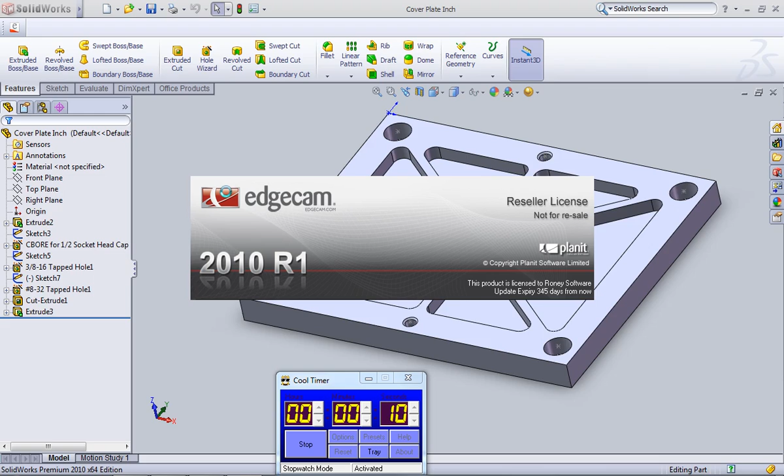Once inside of Edgecam, we're going to launch our Rapid Setup module. We're going to make a few quick choices. We're working with a solid. It's a 2D part. We want one of them, and we want the 0 to be in the center. We're going to be working with mild steel, so that'll set the feeds and speeds correctly for us.

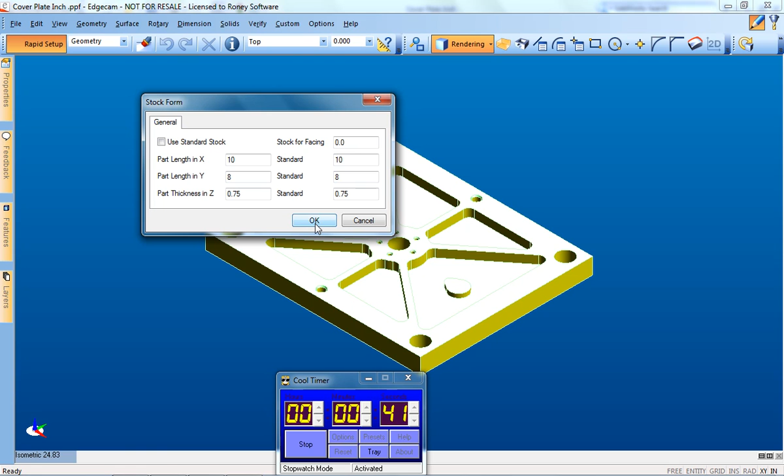Next, we make sure that it's oriented correctly for manufacturing, and we're going to put it on an automatic vise. Take a check of the stock size. We'll choose the extents in this case. And we go out and automatically place this part inside the vise for manufacturing.

Next, we take a look at the part and we can see that we have holes, pockets, and bosses, so we want to nest the pockets and find holes and 2D pockets with Edgecam's feature finder, which will utilize the features from SOLIDWORKS for manufacturing purposes.

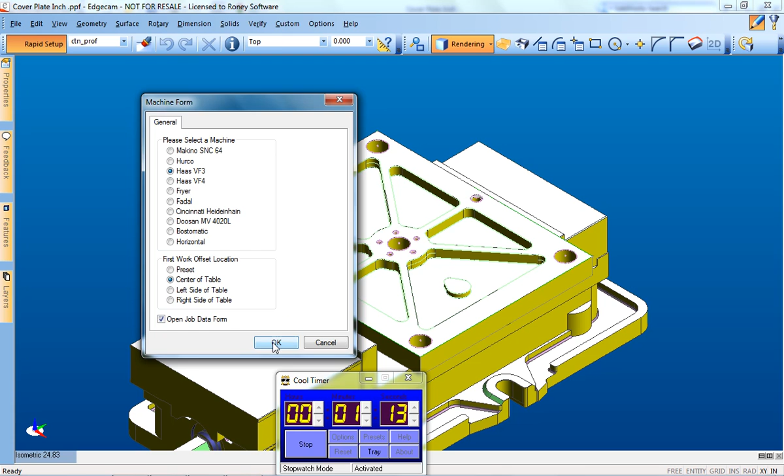And the last choice is simply what machine do we want to put it on. We'll put it on a Haas VF3 and we'll give it a program number.

And in about a minute and a half, as you can see here, we've gone from a SOLIDWORKS file into Edgecam and completely set up this part ready for manufacturing.

So let's do that. Let's go to Rapid Programming, 2D part, and we're just going to accept the defaults here. And as you can see, we are starting to produce the operations to manufacture this part.

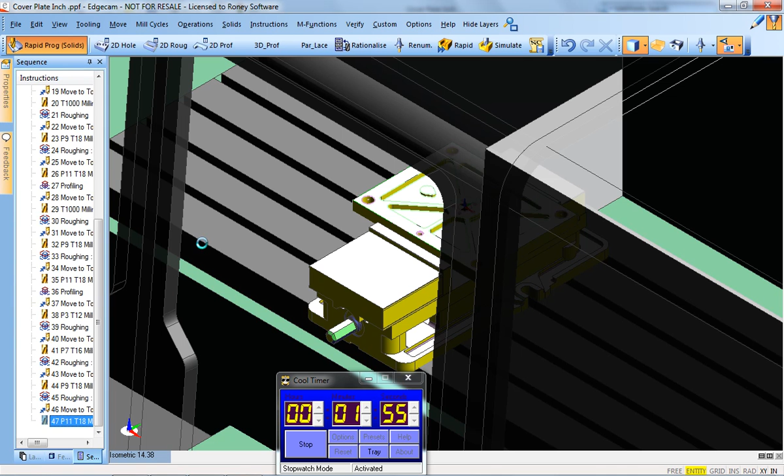It's going to rough it, rest rough it, pick out the corners, finish it in just a matter of minutes.

And in some cases we have options, like that one was if we wanted to ream the hole or just drill it. It was simply yes or no, and Edgecam continues on programming the part.

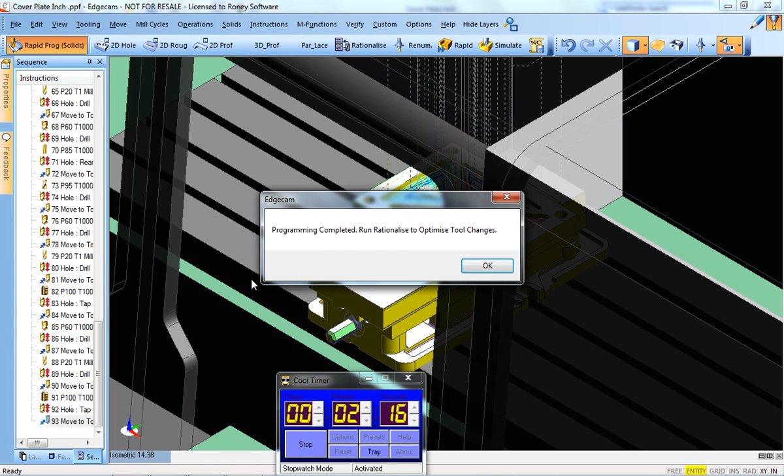The program's complete. And we want to optimize our tool changes, so we run rationalize, which will automatically minimize the tool changes required to manufacture this part for us.

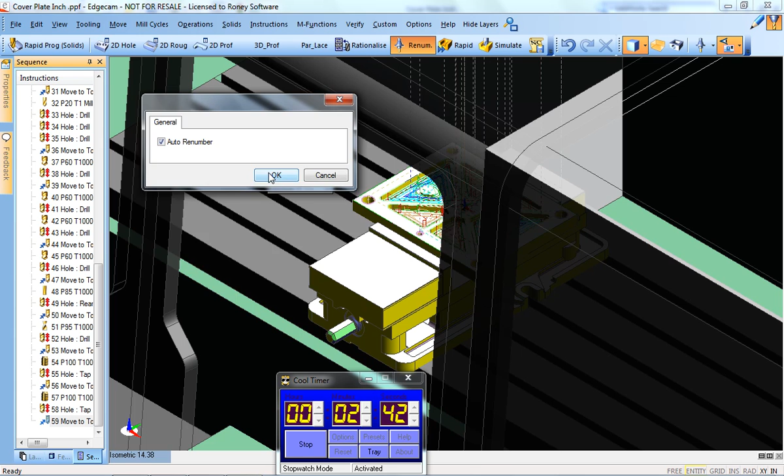Edgecam has a full tool store, which we can assign tools ahead of time with a toolkit, or we can renumber the tools automatically with this module, and we can also change the tool numbers on the fly.

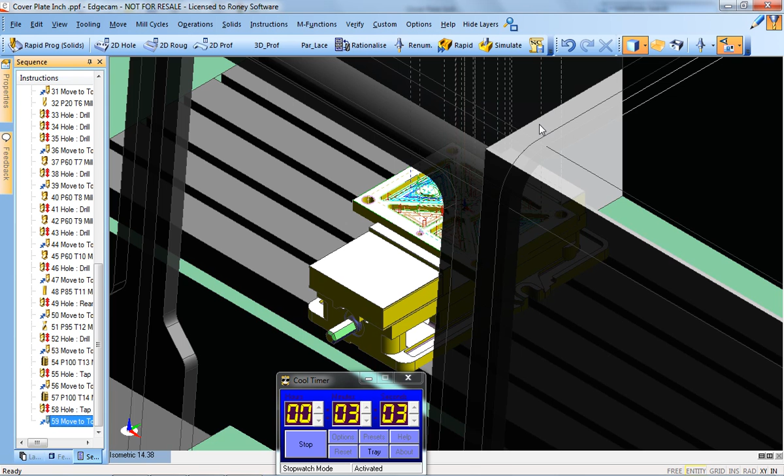Once this is completed, we are really essentially done programming this plate. Now, of course, we want to verify that the tool path is what we expected, so we'll go into Edgecam's simulation module.

That way we have full machine simulation to verify that in fact we're going to get the results that we're expecting. As you can see, we can manipulate this.

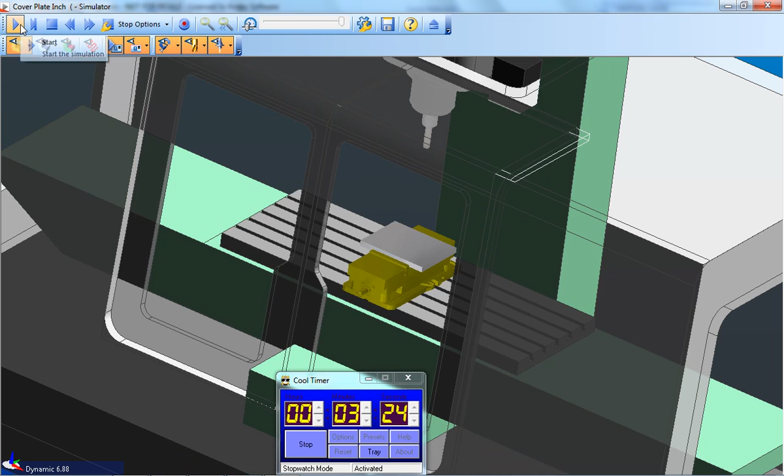And we can see that the part is complete. Now, of course, we can back that up and slow down the process as it's running to make sure that we're getting what we're expecting. But all looks good, so we'll just fast forward that.

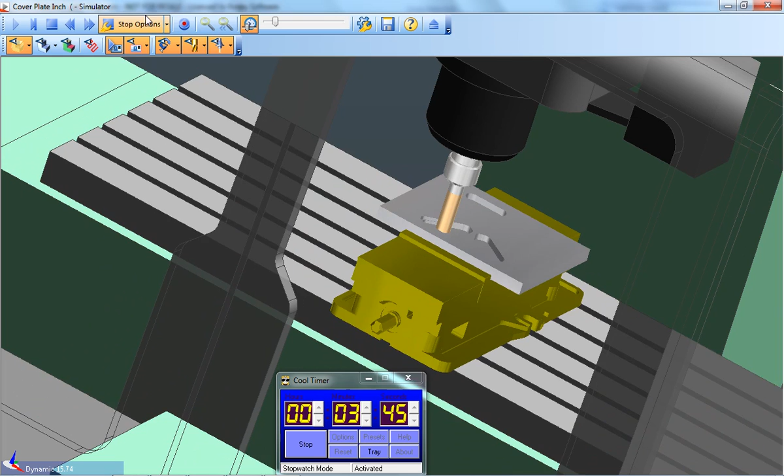And now we're ready for NC code. And there you have it. In a matter of just a little over 4 minutes, we've got good G code.

Now we're back in SOLIDWORKS and we're going to make a revision on our part. We're going to eliminate those bosses and we're simply going to save our part.

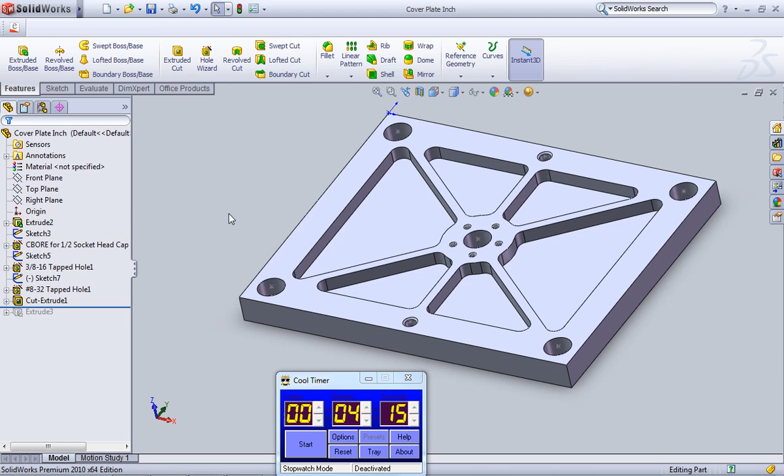And when we switch back to Edgecam, we can see that Edgecam recognized that there was a change made in the design and asked us if we would like to update it.

We'll say yes. In this case, we won't save the original file. Edgecam automatically reloads the revised part, or this could be a family of parts, and immediately starts to reprogram our part for us without us having to pick any pockets or any of the changes that were made.